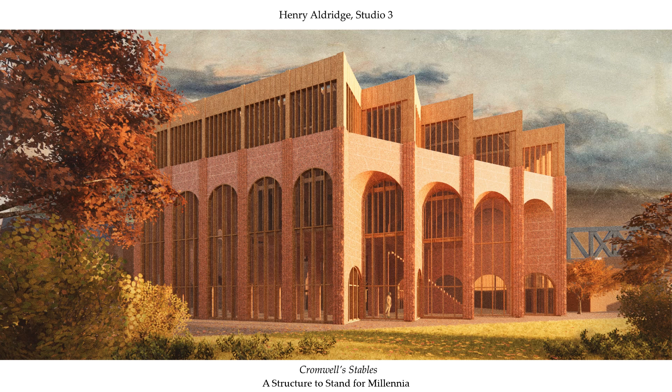The future's unpredictability demands a degree of flexibility when designing a building. To prevent the endless carbon emission of demolition and rebuilding, structures must be constructed such that they can last for far longer than currently imagined.

I had previously designed a lightweight building centered around program with minimal concern for its container. Emphasis was placed on its recyclability. The future, however, must be in the heavy weight and the interest in long-lasting container with non-specific program, and the need for reusability over recyclability.

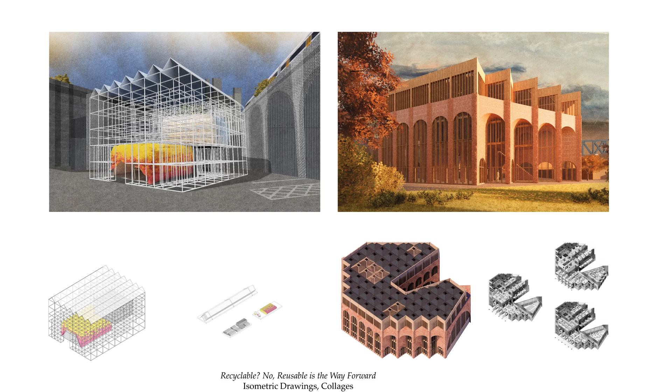This is not a new idea. The world is littered with structures older than a millennium. Ely Cathedral has lasted some 980 years using techniques learnt from the Romans. With this, they built a sturdy shell, capable of housing both the clergy but also cavalry horses, as Oliver Cromwell proved despite the church. He unwittingly changed the space's experiential qualities dramatically, as a strictly ordered, incense-scented rhythm of liturgy was replaced by the cacophony of horses and their co-inhabitants.

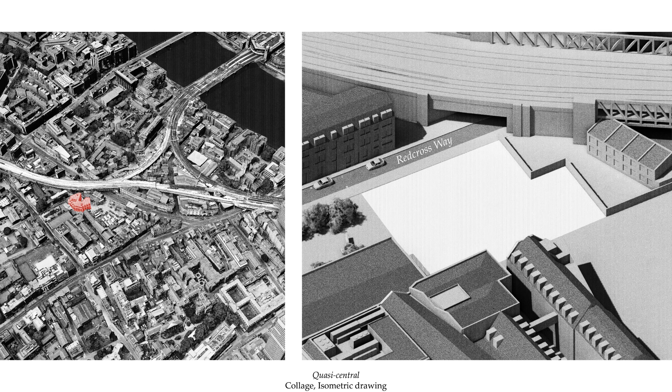Spending his time in an equally formidable building, St. Jerome used the timber structure to specialize the space and infinitely improve the flexibility of his study, again shifting the experience of the space. And so, reasoning from these precedents has been applied to a proposal. The currently unoccupied site is located in a surprisingly low-density area of Southwark, considering its proximity to the river.

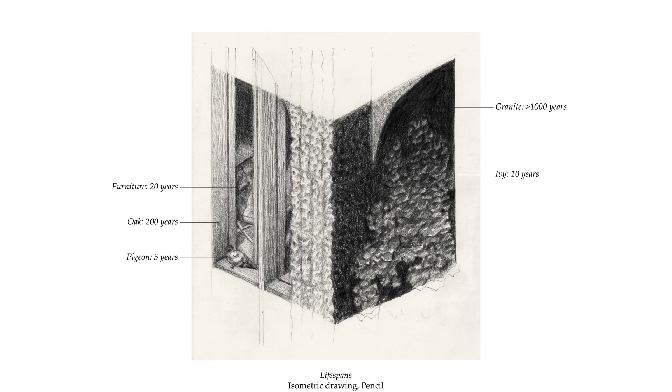The structure itself is composed of solid granite blocks, forming a heavyweight structure with significant thermal mass and incredible longevity. Lighter weight timber sections attach parasitically, forming internal rooms or spaces. While the granite has the potential to last millennia, the timber may last centuries, and the fittings decades. Although some flexibility has been sacrificed for the sake of longevity, the interior of the structure is highly adaptable and can be refitted with the timber infill to serve a variety of programs.

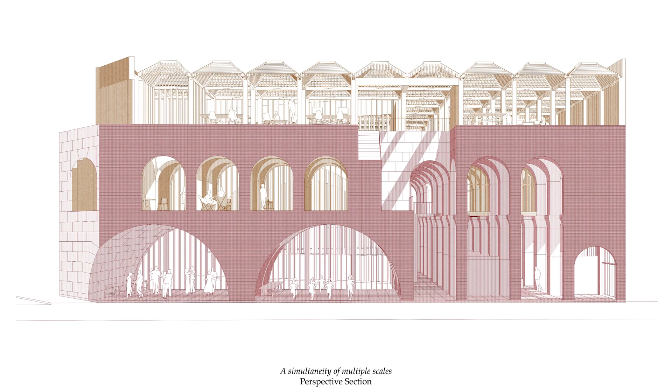This ability to serve multiple programs is amplified by the variety of scales of space present, from large triple-height spaces to more enclosed arch spaces. The system also presents a variety of thermal qualities of space. In order to preserve the granite's monolithic quality, insulation was not included in areas requiring a less constant temperature, including more transient spaces one may walk through.

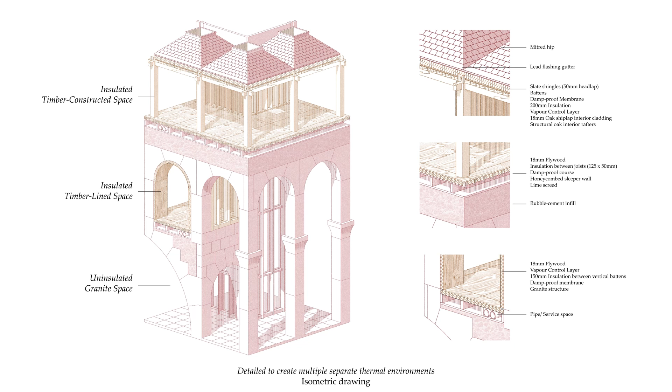Rooms that may be occupied consistently for a day or longer are lined with plywood and insulation to maintain a constant thermal environment. Of course, all spaces are heated to a large extent by solar gain, with ventilation possible through windows for cooling. Otherwise, services and pipes can fit underneath the suspended floors. Traditional methods in parts have been combined with more modern technologies, juxtaposing a slate-shingled roof against bent laminated plywood interiors.

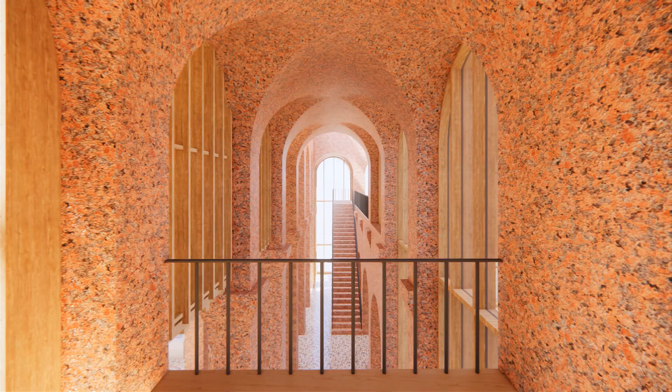As thermal environment changes, so too does the experiential, as the various environmental and material differences coincide to create dramatically different spaces that share a common geometry in the vault and column. The quietly intimate space of the skylight-lit cafe gives way to the cavernous height of the gallery. This timber lining and infill allows for highly specific specialization and the dividing of otherwise cavernous spaces into cozy studies or workshops.

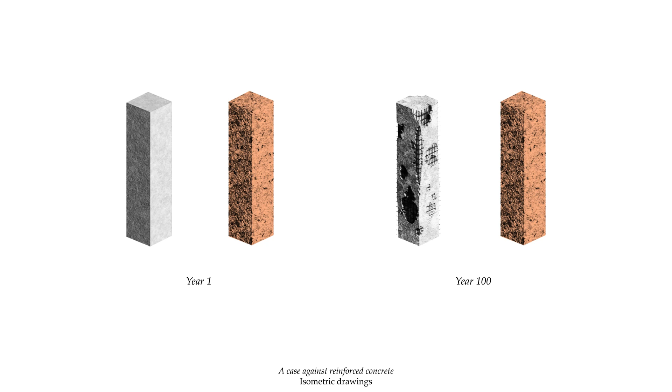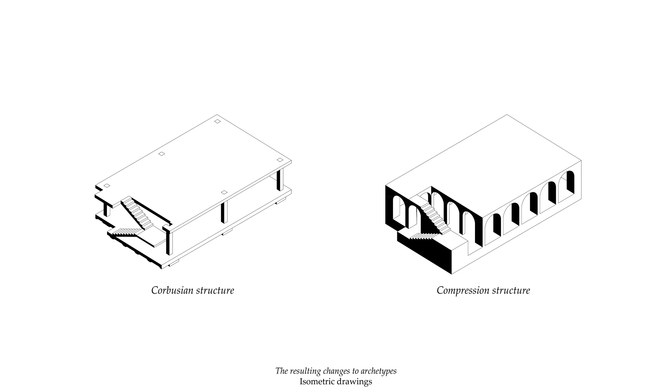Combined with the logic of structural stone, the site's geology has a significant influence on the structure's form. Despite being the darling of architects since the 20th century, reinforced concrete's lifespan is curtailed by the corrosion caused by rebar. As such, stone is used. Now this affects significantly the form of the structure, as the tension of lintels and cantilevers must be replaced by the simple compression of the arch and vault.

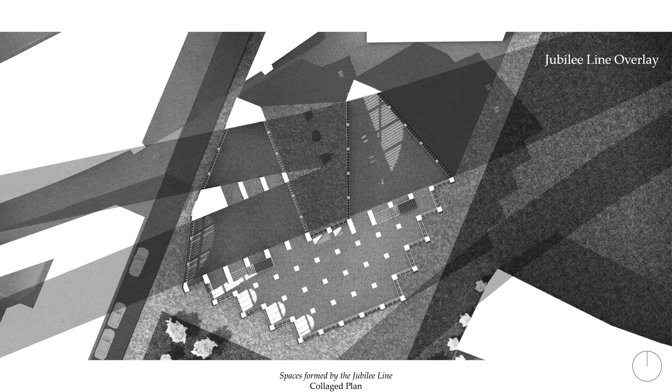As for the building's construction, the Jubilee line runs under the site, and no deep foundations may be built within 3 meters of the tunnels. Deep foundations are necessary in order to load directly onto the stronger London clay. The resulting restriction creates large arch spaces, as the structure is forced to load only on the edges of these boundaries. This plan highlights the 3 large key spaces created by the methodology, with their expansive spans therefore being a necessity. The angular plan of the structure is again due to the form of arches.

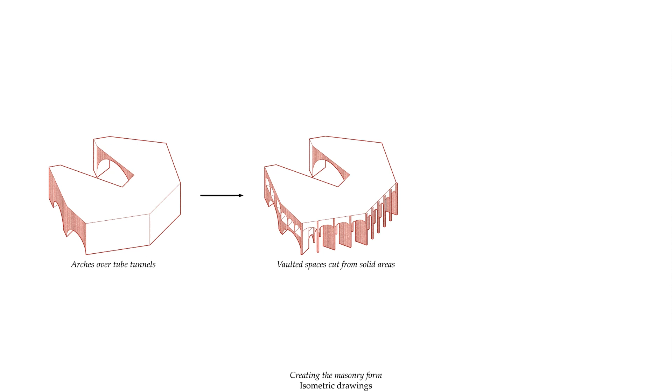The form was ascertained by first taking the plan of the site with tube tunnel cuts removed. The arches were then cut due to their geometry. These cuts were made such that all overhangs or incomplete arches were removed, as these would constitute a cantilever. With the geometry of the foundations understood, the remaining solids in the mass were cut into vaulted spaces, whose smaller spans will likely outlast the large arches. Cuts were then made in the structure to allow daylighting for all spaces.

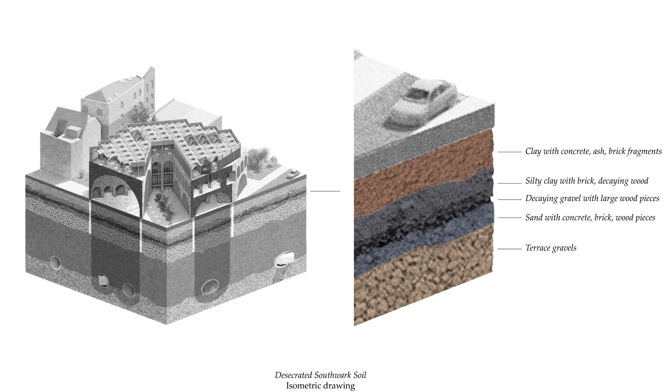There are further ramifications, however, to the site's geology. The made ground above the structural clay is rather polluted, being filled with centuries' worth of waste, including brick fragments, rotting timber, and concrete pieces. The site currently exists as a concrete-covered car park atop contaminated clay.

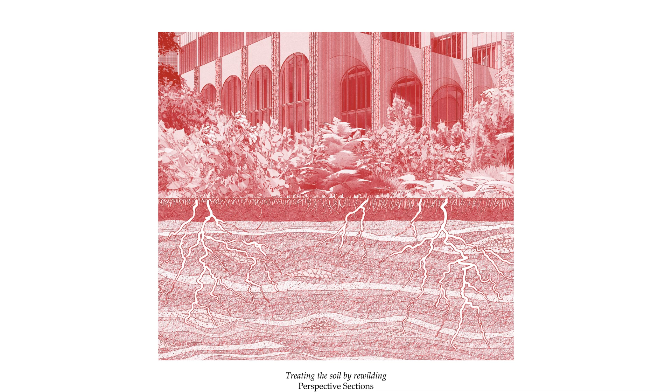To remedy this and fertilize the ground, I propose strategically rewilding the land around the building. The strategy comes in the choice of plants initially sowed. Comfreys are particularly effective due to their deep roots being able to extract nutrients from further than similar plants. Additionally, the comfrey's foliage produces a concentration of nitrogen, phosphorus, and potassium compounds common in fertilizers, feeding the ground. The common nettle will also be used for similar reasons of foliage nourishing surrounding soils.

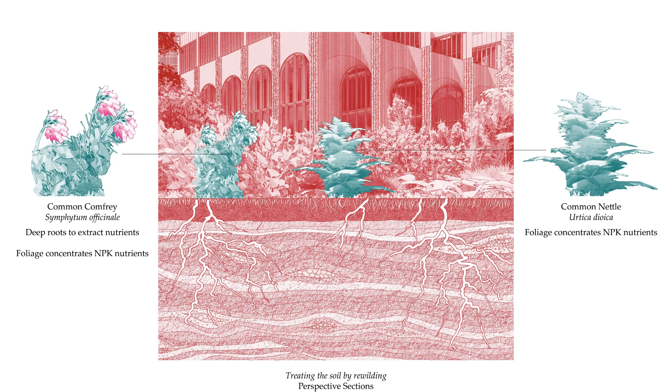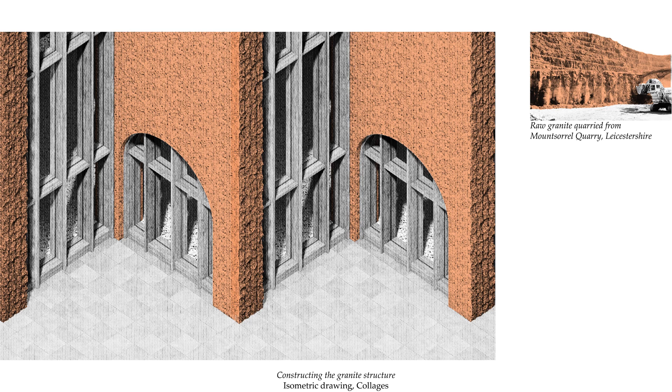As an element intended to last an incredibly long time, care has been taken in dealing with the granite structure. These structural elements are composed of granite extracted from Mountsorrel Quarry in Leicestershire, from which granite has a pink hue. The distinctive rough edge and cut lines are produced by the process of cutting stone along its natural fault lines before extraction. The stone is then cut into movable units in a nearby facility before stonemasons finish the piece and cut any details.

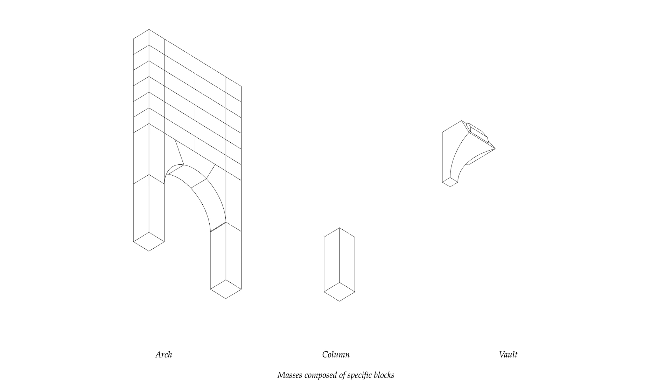The stone's source points to another advantage over concrete. The majority of stone's embodied carbon is in its transport, and so, having found the location of all dense stone in the southern British Isles, I chose the closest available quarry to minimise carbon emissions. Once transported and cut, the stone is laid piece by piece in interlocking blocks, joined by NHL5 lime mortar, with each piece sized specifically so that it is below the lifting capacity of most cranes.

The process of extracting and then cutting the stone produces an excess of rubble, which can be used as infill in areas of the structure, minimizing waste while reinforcing the vaulting. The aforementioned lime mortar is used rather than Portland cement in the infill to reduce embodied carbon, due to lime's lower burning temperature.

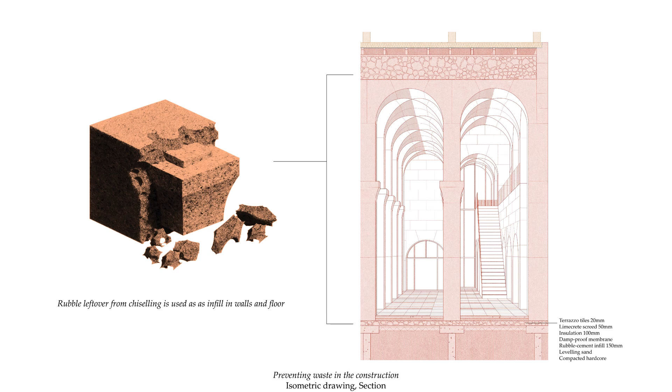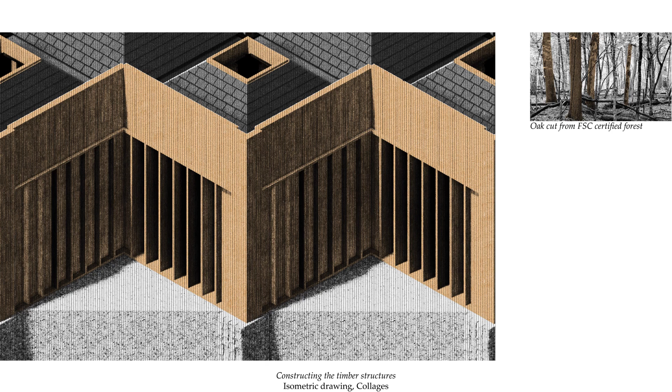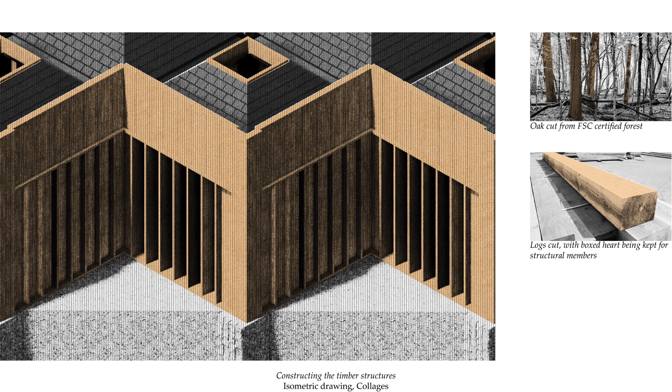While the timber may not be intended to last as long as the stone, it should still be designed to have as long a lifespan as possible. Facing the exterior weathering conditions at parts, the timber must be hardy. It is first cut from FSC certified oak, then the logs are cut into parts. The logs are cut such that the centre of the log is retained as the boxed heart. The boxed heart will be used in structural members, as the heart's presence ensures that all warping is equalised around a centre. The wood is then seasoned in the dry space for 4 to 5 years.

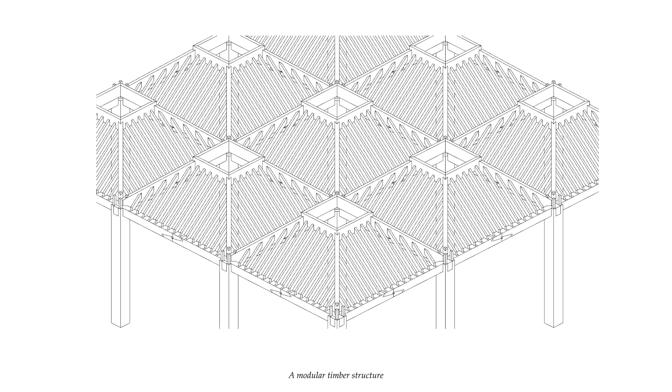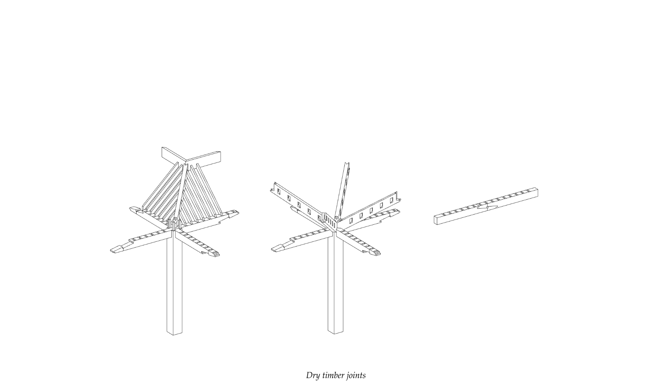In the roof, the structure consists of a modular screwless system. Screwless because oak can produce an acid that corrodes steel over time. Up close, traditional joinery is used, including mortise and tenon joints, cross-halving joints, and finally, scarf joints. Scarf joints are used due to length restrictions caused by the natural dimensions of oak.

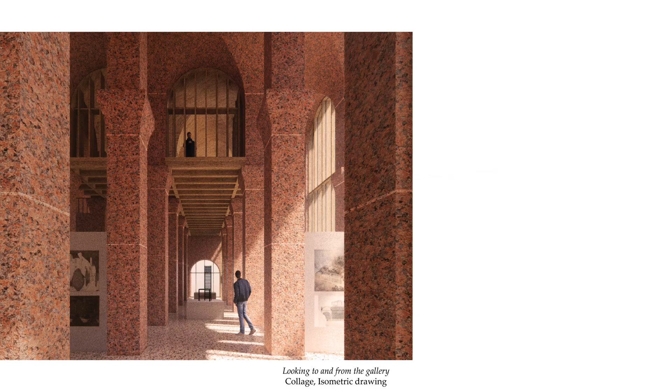To properly understand the applications of the building, I propose some programs. The Southwark Arts Centre demonstrates the use of large-scale spaces, shown in particular in the lecture theatre and exhibition area. Taking advantage of the height, the vaulted space located at the front becomes an exhibition space. The rhythm of the columns combined with the dividers provides a strictly directional space. Onlookers can gaze down from the cafe into the gallery, the cafe's insulated timber structure being perched on the corbels of the granite columns.

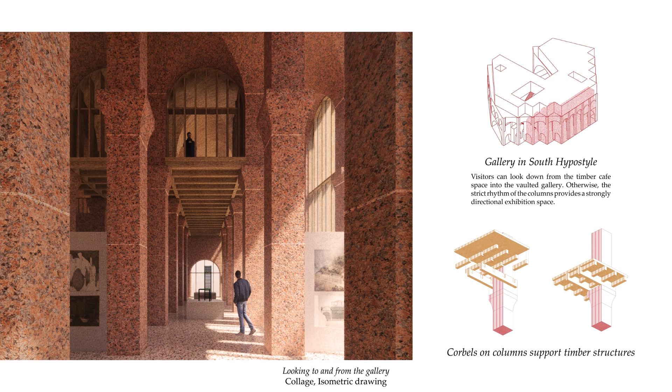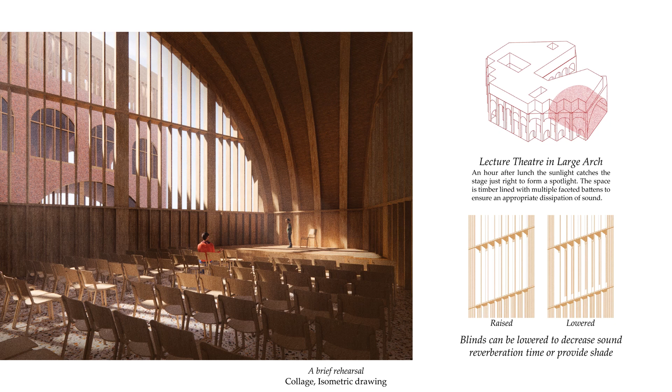Increasingly relevant, housing presents an opportunity to implement an entirely cellular program. The vaulting comes into its own as its columns are used to help support multiple bedrooms, while the lecture theatre is subdivided dramatically.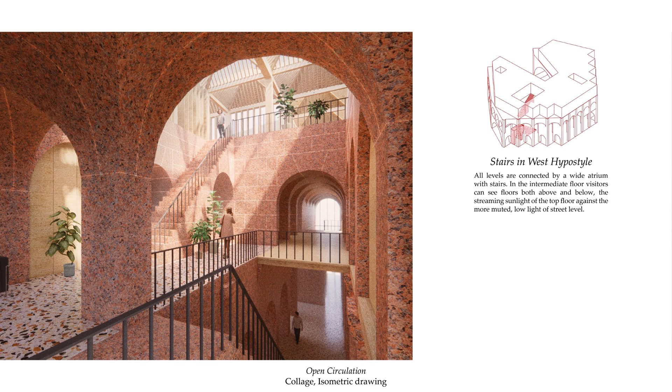Acting as light well and ventilation shaft for the public areas, the stair atrium connects all floors in a single view. In all proposed uses, the stair acts as a means of drawing light into the darker sections of the vaulted spaces. In this version of the atrium, the use of plywood walls against the granite structure can be seen clearly.

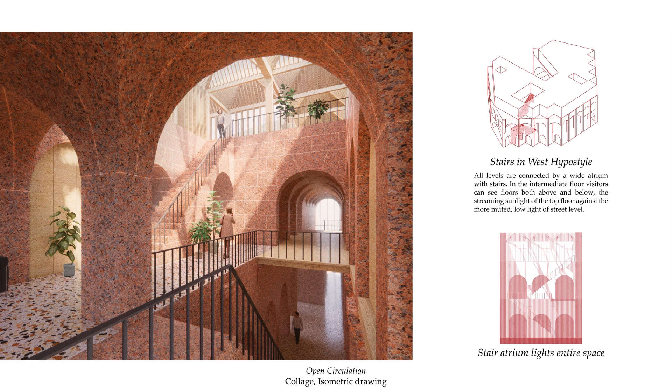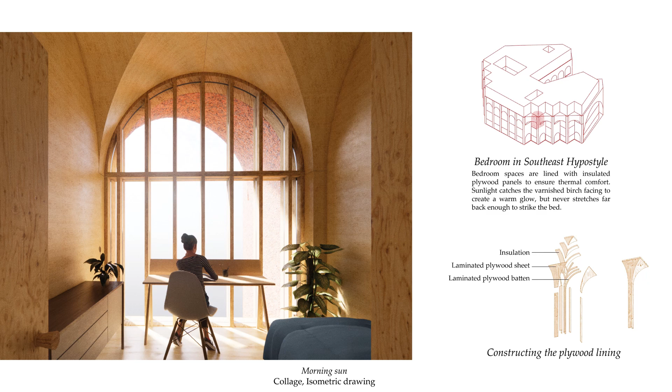After walking from the stairway, you proceed to your bedroom, in this case housed inside a vault where the exhibition space once sat. The bedrooms are lined with plywood, laminated to provide a curved form capable of hugging the vaulting with room for insulation. Within the room, the sunlight illuminates the desk for reading, but never stretches far back enough to strike the bed, instead providing a warm glow from the ply's varnished birch facing.

With regard to sunlight, the precise daylighting character must be explored, as the one constant in the building's entire lifespan. Featuring both large and small-scale spaces requiring illumination, the makespace provides such an exploration. Metal and wood workshops are located strategically to receive indirect but strong sunlight to allow for work.

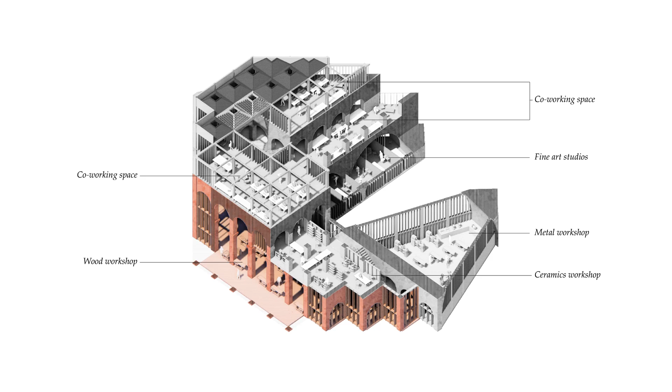The wood workshop replaces what was the exhibition space in the vaulted space. The workshop hosts workbenches along with machinery including a CNC router, lathes and bandsaws, all of which are serviced by the galvanized steel gantry held aloft by the granite corbels. The space is shaded with horizontal louvers to prevent distracting sunlight from reaching the workbenches.

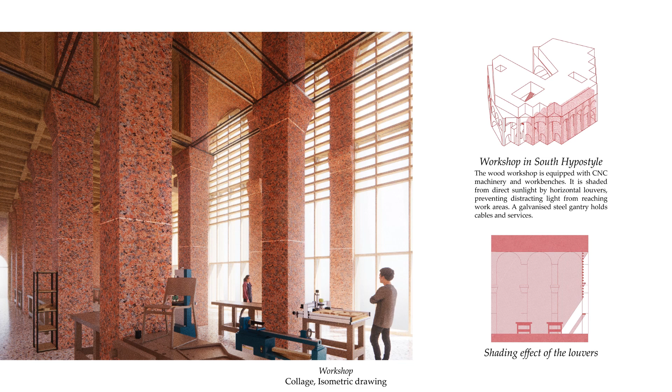A co-working space is now housed in the roof's timber-constructed space. Daylight is available deep into the structure via skylights, in a roof that references vaulting. While the interior is entirely timber, plywood is used in those areas with shorter lifespans, the floor and fittings, while oak is used in the structure. Should the space need ventilation, the skylights can be opened, providing a low-rise stack effect.

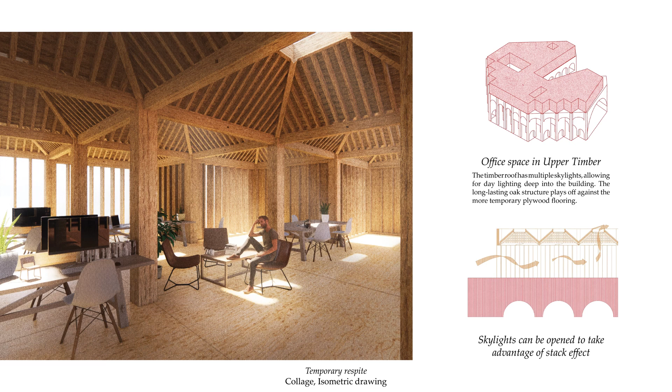But what if I were to experience the vaulted space as gallery and then as workshop? Would I know it was the same space? These two images alone would suggest perhaps not, as the phenomenology of the space has been altered dramatically. Where the almost ecclesiastical gallery invites me to the window, the fierce horizontality of the workshop encourages me to peer to the side or on the columns.

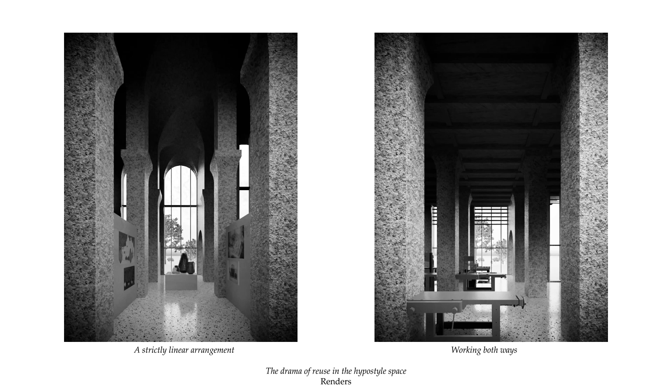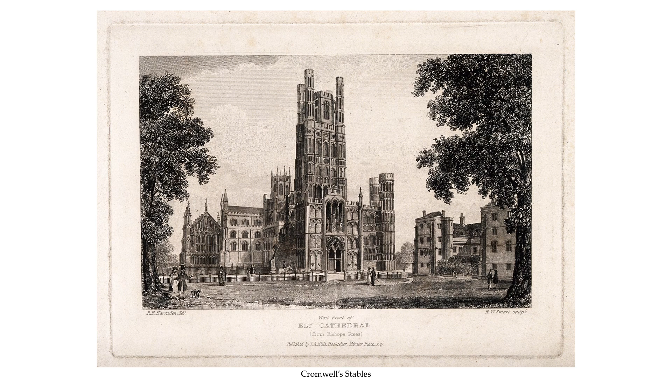But is it not arrogant to even propose how the structure lived once built? Does it not cease to be mine after the last stone is laid? Speaking on the solitude of buildings, Rafael Moneo referred to how buildings take on their own identities independent of the architect's intentions. One could only assume, therefore, that this building would surely take on a range of uses, some respectful to my wishes, some disrespectful, and some that hardly knew I existed at all.

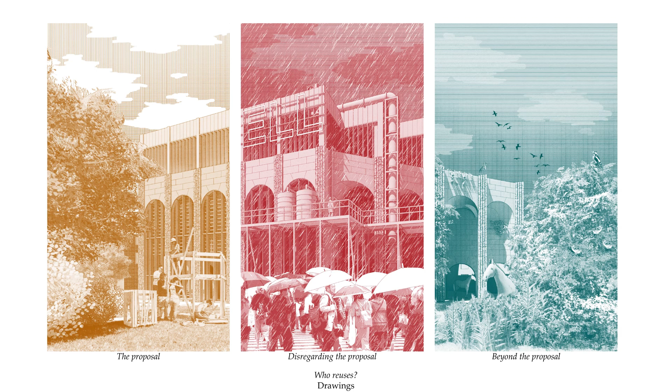Who can say if Cromwell thought of the original builders of Ely Cathedral at all, or if he just looked to house his horses? Can the builder ever really impose their wishes upon the future of a building? John Soane must have thought along these lines when choosing to have his Bank of England depicted as a ruin ruled over by nature rather than humanity.

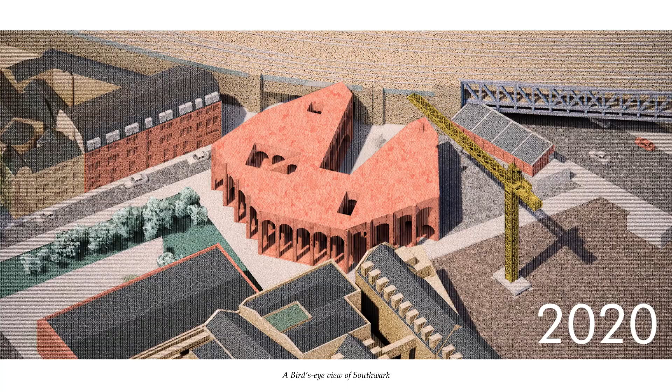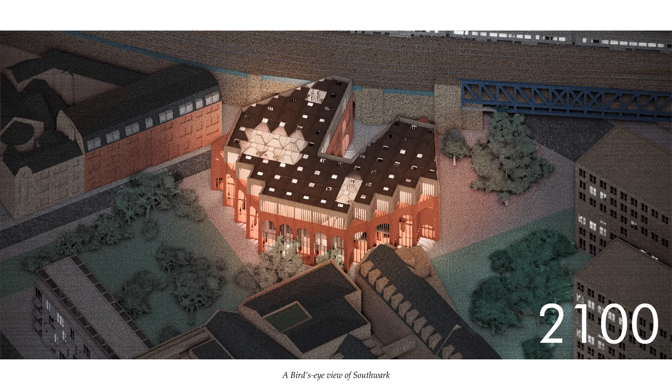And so, I've imagined how my building could live, if it is mine at all. After being built, it would exist as a stalwart of another time in Southwark, changing ever so slightly, but not to the extent of its surroundings. As the world changes in ways I couldn't have imagined, so too does the building, adding and subtracting new elements.

After environmental calamity, when the timber and fittings couldn't survive something that couldn't have been predicted, I like to imagine the stone standing as a ruin. I would hope that it finds some sort of occupants, though I doubt that they would care, nor know, for what I think.

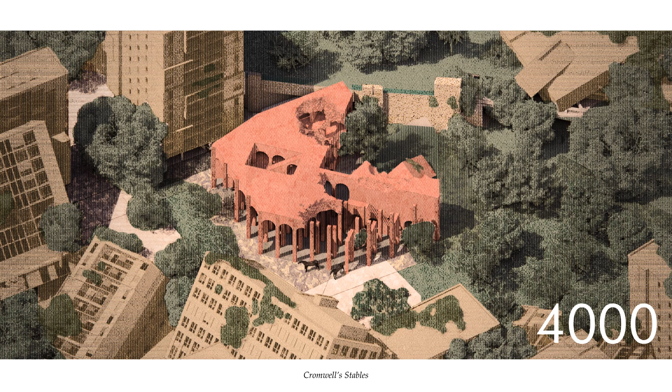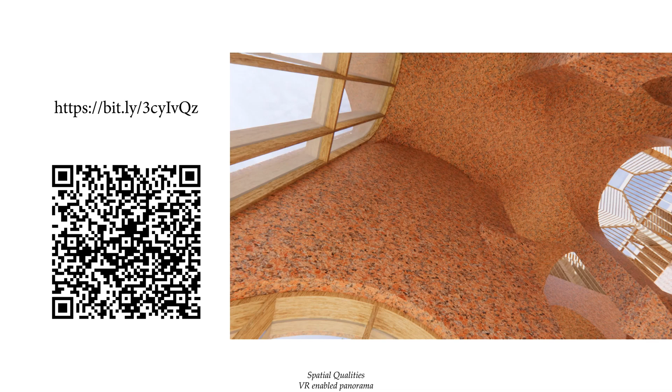Here is a video giving a preview of the panorama. The panorama should open as a page on a browser, and if open on a smartphone will produce an approximation of virtual reality, tracking your movement. If on a computer, click and drag with the left mouse button to navigate.